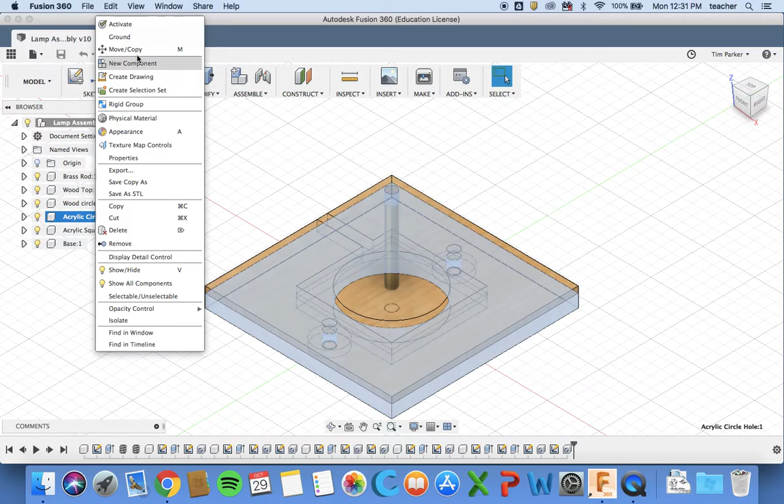We need two acrylic circle holes, so we're going to right click that. We're not going to copy, that's not the same thing. We're going to go to move copy, and we're going to click create copy. For that, you probably just want to drag it, maybe drag it off to the side here. Hit OK.

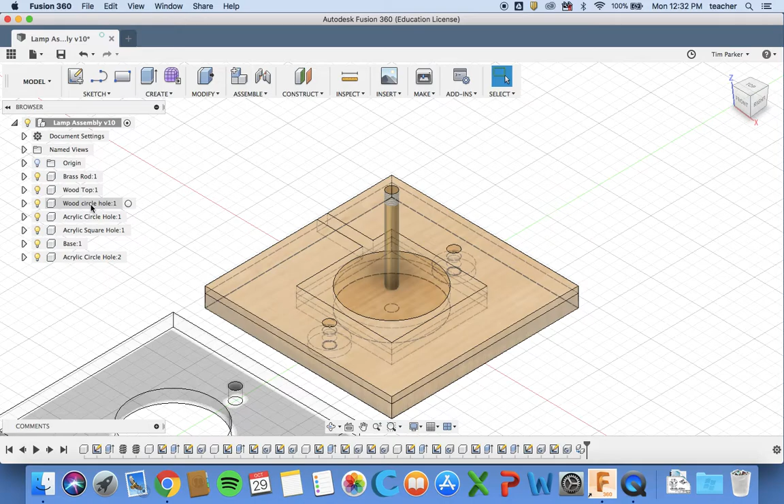Okay, so we've got acrylic circle hole 1, acrylic circle hole 2. We also think we also need another wood circle hole. So again, we can right click that, move copy, create a copy, and we're going to maybe drag it this way. So our wood one's right here. Hit OK.

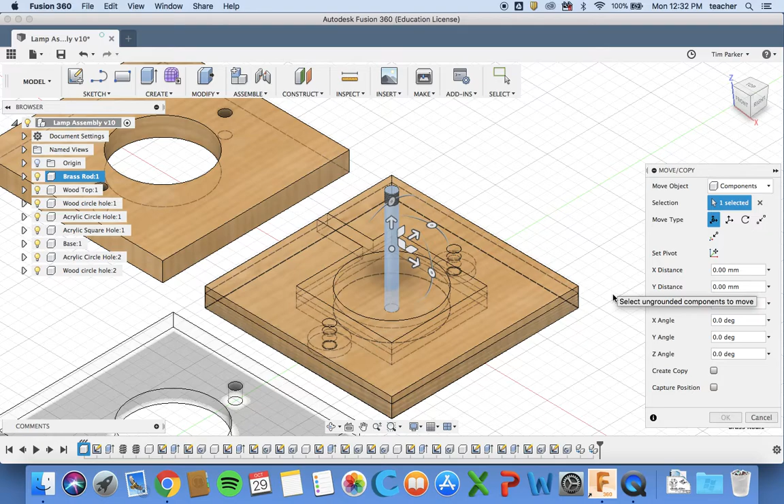Okay, wood circle, acrylic circle, both the second ones, the copies. Then we've got one wood top, and we're going to need two brass rods. So again, we're going to move copy, create a copy, and we're going to drag the brass rod, let's drag it out to here. Okay, so we've now got all the bits that we need.

Now what we want to do is we need to ground one of them. By grounding, it basically means that that can't move, that's fixed, so everything else will move to it. We want to start with the thing that is going to be our sort of bit that we screw into to begin with, and that's going to be the wood top. So our wood top, if we right click on that, we can ground it, and that will show a little drawing pin to show that's the one that's grounded.

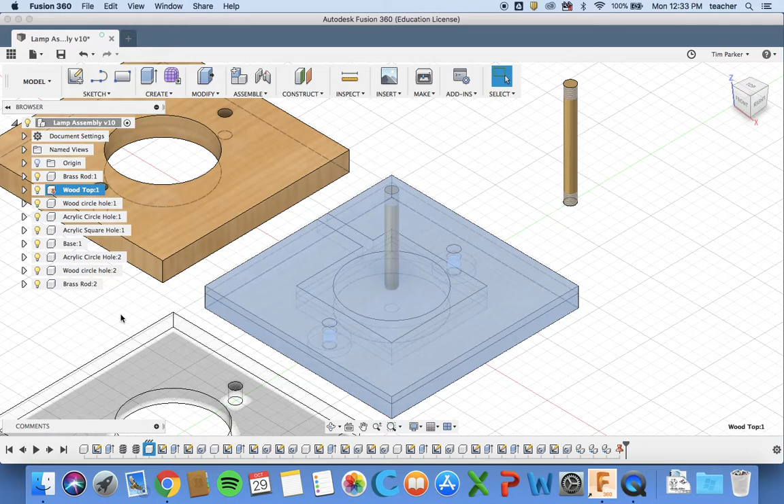Now what I'm going to do is I'm going to start assembling it. The best way to do this is to turn off all components you don't want to see, and just leave the two you do. So we want our wood top and we want our brass rod. Everything else, we can turn off the light bulb so that we can't see them anymore.

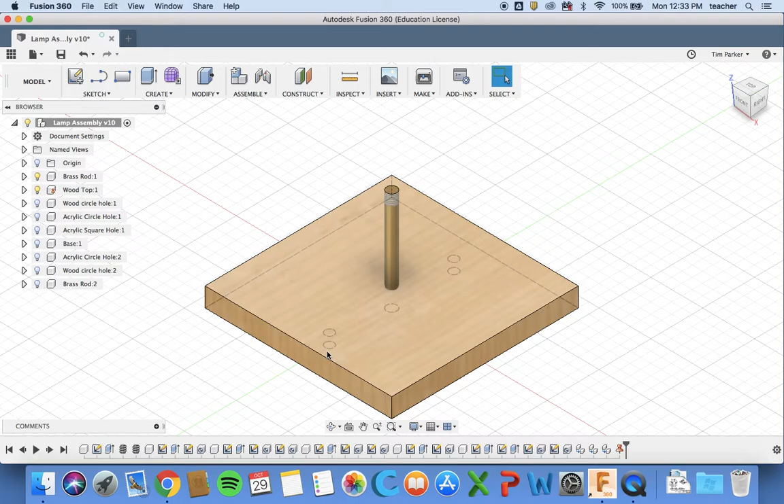Okay, so our brass rod is going to move to our wood top. Here's the top of the brass rod. We want that to connect into the hole, which is on the bottom - I'll show you here, the bottom of our wood top. And we also wanted to screw up 5mm into it.

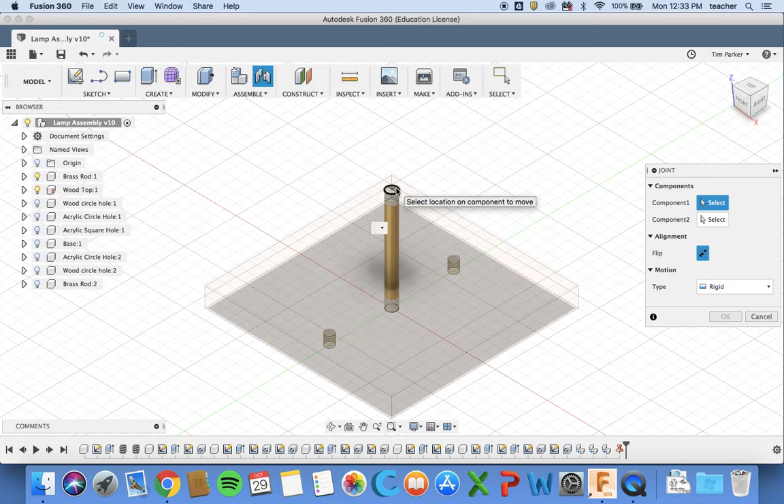If I go back to the original view, we're going to click assemble, so assemble a joint. If you click on joint, you can choose the top of the brass rod. If you just choose the circle, that's basically a moving point. Then if we click on the underside, so we've chosen component 1, for number 2, we need to look on the underside, and we want to choose this hole. So we select that as our second component, and you'll see it'll move towards it.

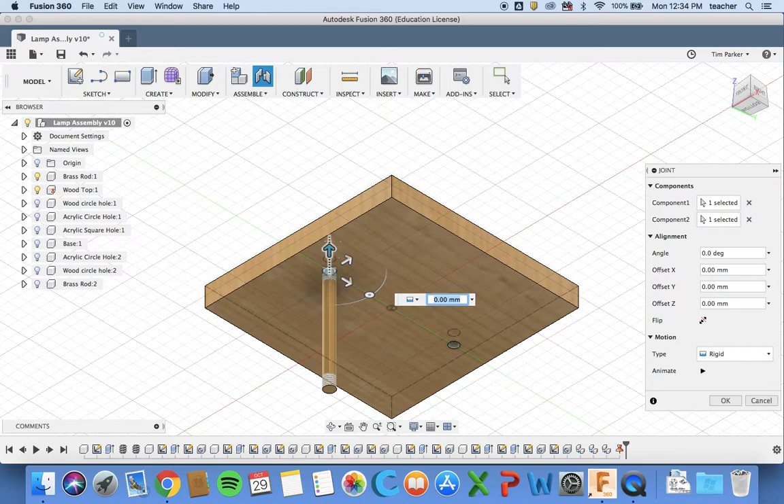Depending on what type of joint you've got here, it will do different things. So if I had it as a revolute one, you can see it's spinning. We're going to keep it as a fixed, rigid joint, but we do need to move it up 5mm, because if we look at the side view, it's not gone up into the hole. So we're going to click that arrow to move it up, and you can either drag it, or we can put a number, so I'm going to put 5, and it should go up 5mm. Enter.

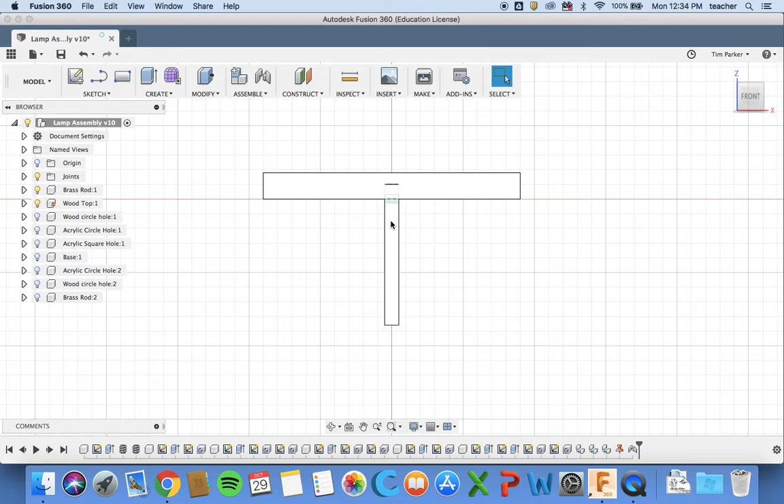So if I go back here, you can see that that's now inserted. You can double check it by going to the display settings, changing it to wireframe, and you can see that yep, so that is screwed inside of my hole. Okay, so I'll go back to my normal display.

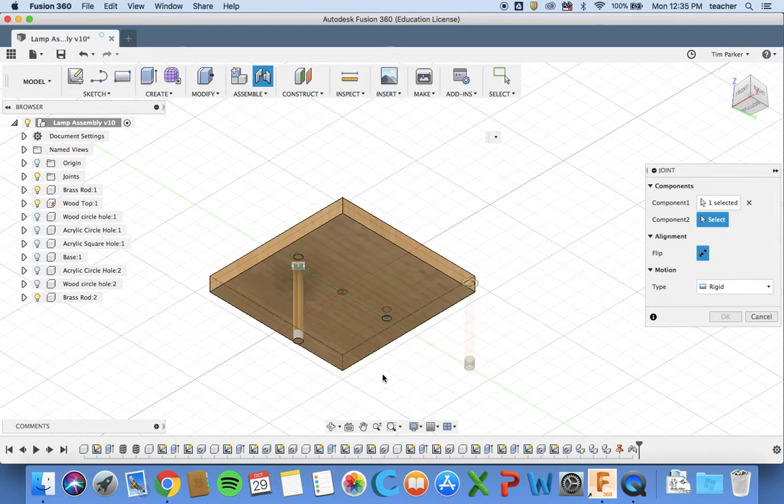Now we want to put our second brass rod into the other hole, so we're going to turn on that one, and we're going to click on joint. We're going to choose the top of it, same as we did before. We're going to choose the underside, same as we did before. And again, we need to click this top arrow to move it up by 5mm. Rigid joint, hit enter. So imagine they've been screwed in, or they're glued in, for example.

So they're not going to move anymore. I can check that they're both the same by turning it sideways. Yep, they look about right.

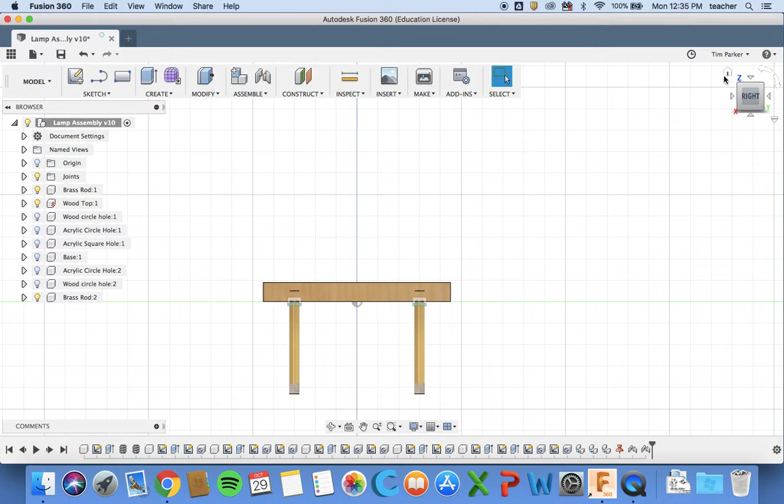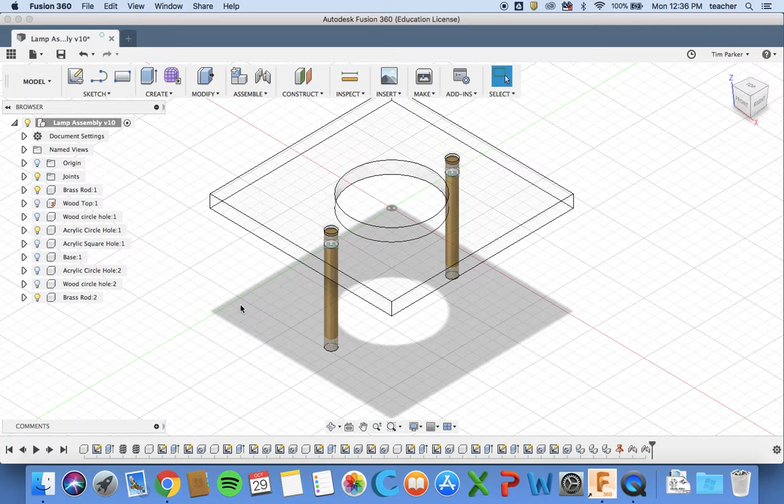Okay, so the next thing is we're going to bring in our acrylic circle layer, acrylic circle number 1. It's already in here, but it's just not quite in the right position. For that, I'm going to turn off my wood top for a second so that I can locate different bits. I'm also going to turn off my brass rods because they're sort of right in the way of it.

And I'm going to click joint, and I want to click the top. So my circle, the top of my circle area, just the one on the left, that's fine. And then for our second part, we're going to turn off this, and we're going to turn on our wood top.

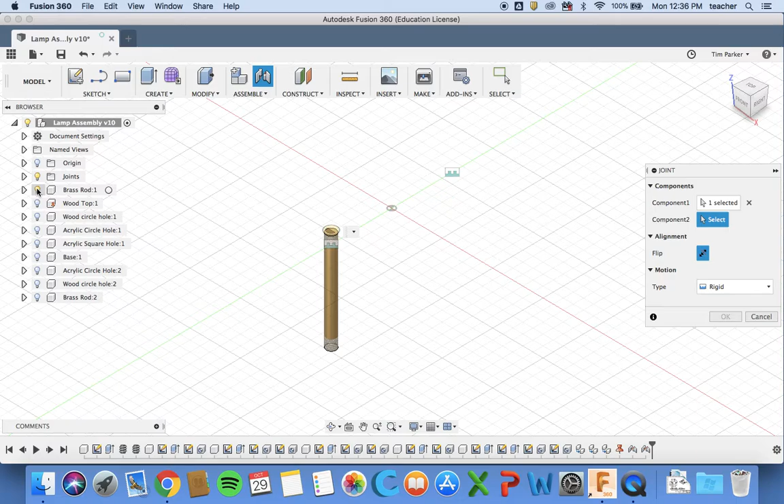We're going to turn on our brass rod, and choose the bottom of the brass rod. Now if I turn back on my acrylic circle, you'll see it's moved to it. So now I can turn them all back on.

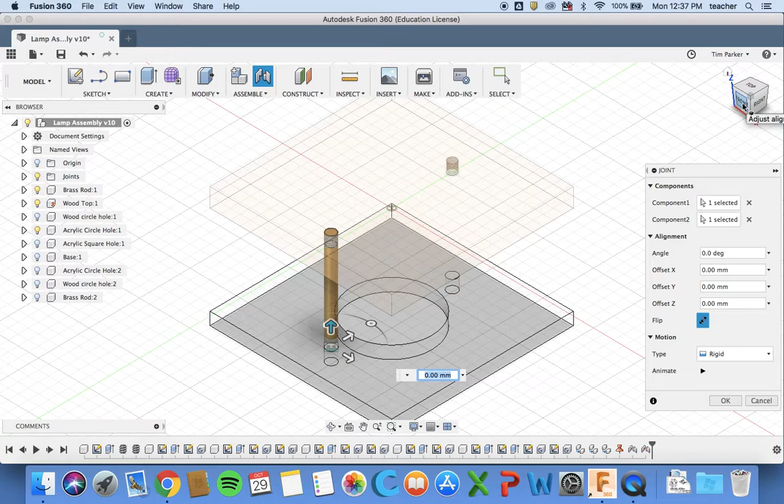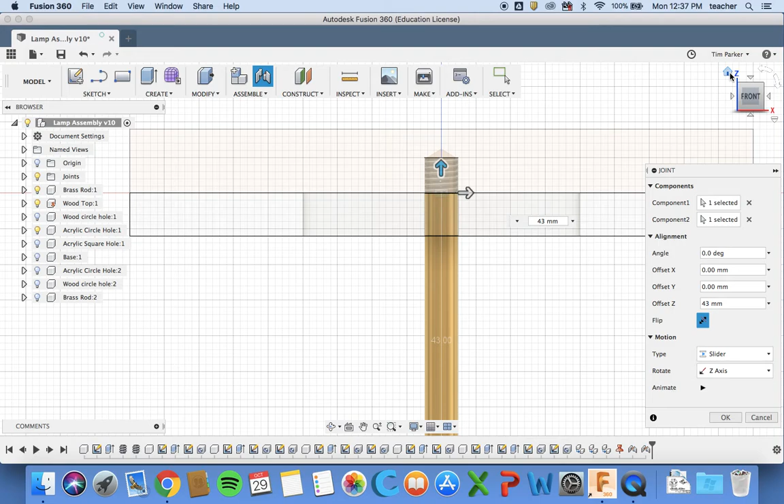This time we just want to move it up. Easiest way is to turn it so you can see it sideways, then drag it up until it's in line. If you zoom in, it should be an exact number, I think 43 millimeters. I haven't worked this out, but that looks correct. Type in 43. And that's going to be not a rigid joint, it's a slider joint, so it can slide up and down on the tube. Hit enter - so we've got our first piece of acrylic slid onto our rod.

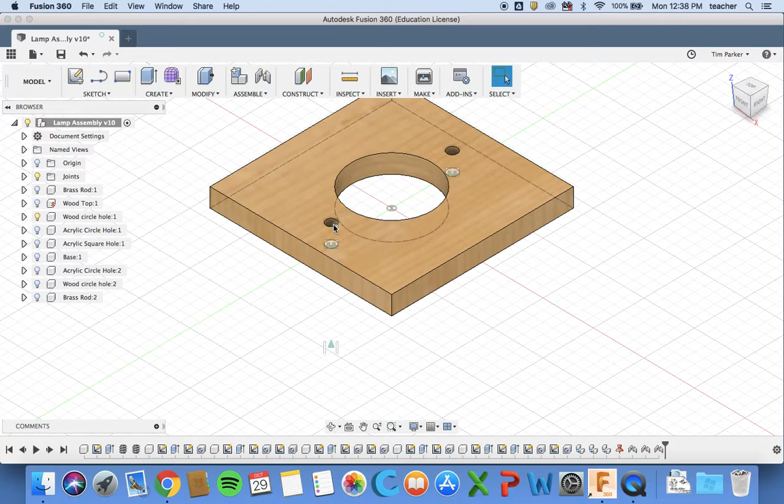I can also turn the other rod back on. For the next piece we're going to have a wood circle. I'm going to turn off all the other ones just so I can select this, go to joint, choose the top of that, turn that off, turn on my brass rod 1, and choose the bottom of it. You'll see my wood circle has moved to it.

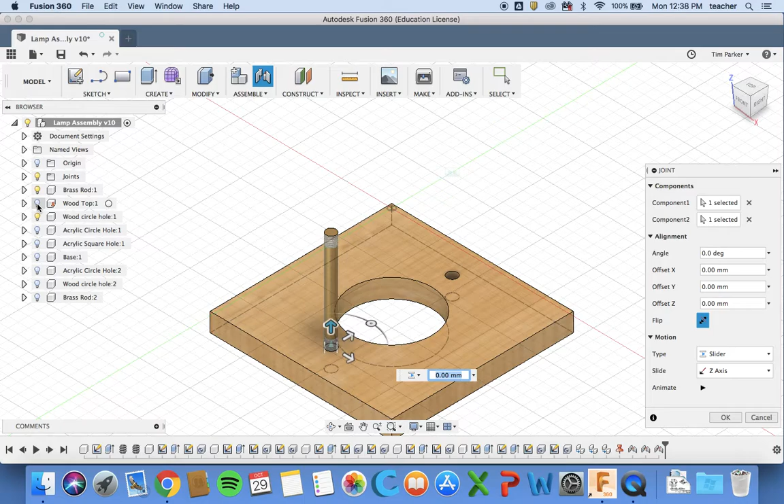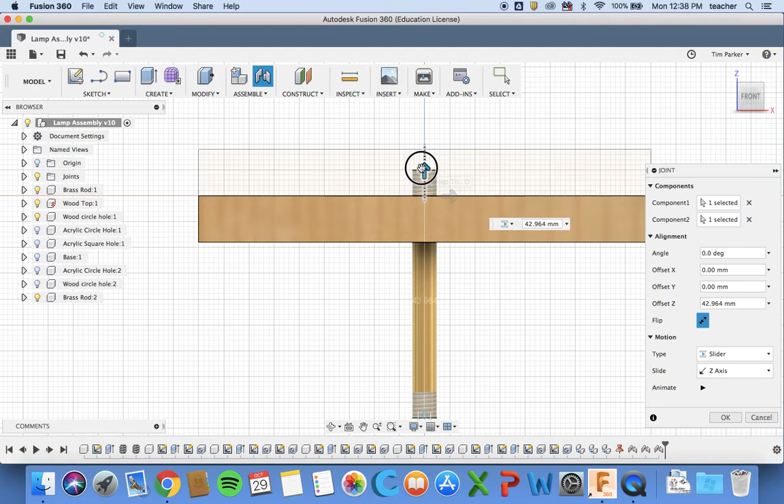I can turn everything else on now, and drag that up - again it's going to be a slider. If I turn it sideways to side view and zoom in, I can bring it all the way up so it lines up. I think 43, yep that looks right. Hit enter.

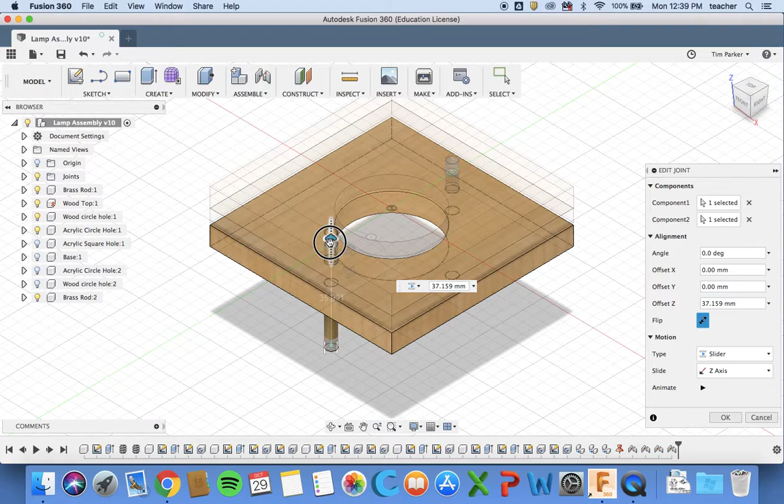I've just realised I've done the wrong thing - I've moved a piece of wood. I've made a slight error here, I forgot to turn back on my acrylic, so I've actually slid it too far. If I go back to my joint here, the latest joint in my timeline, right click, edit joint, I can bring it back down again. It went too high. I just need to make sure I turned on my acrylic - I was thinking 43 didn't seem right.

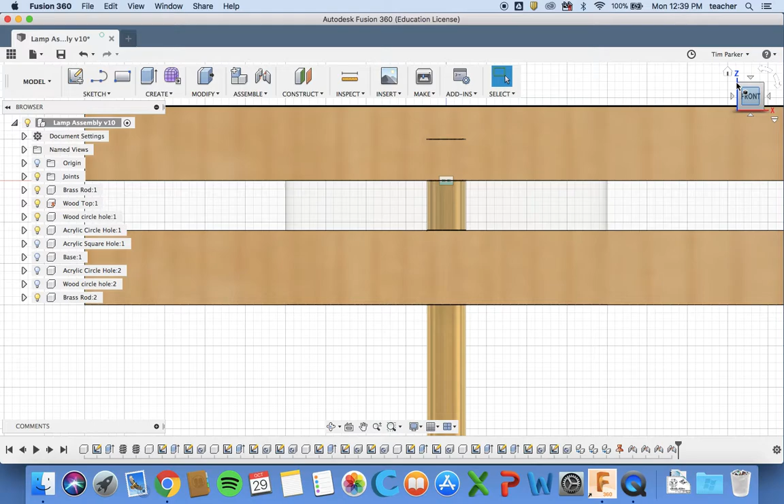If I drag that up in line with my piece of acrylic, it's showing to be 37, I think. Does that look right? Zoom in a bit. Yes, 37, okay so 37 for that one. So I've now got my wood top, my acrylic circle, my wood circle.

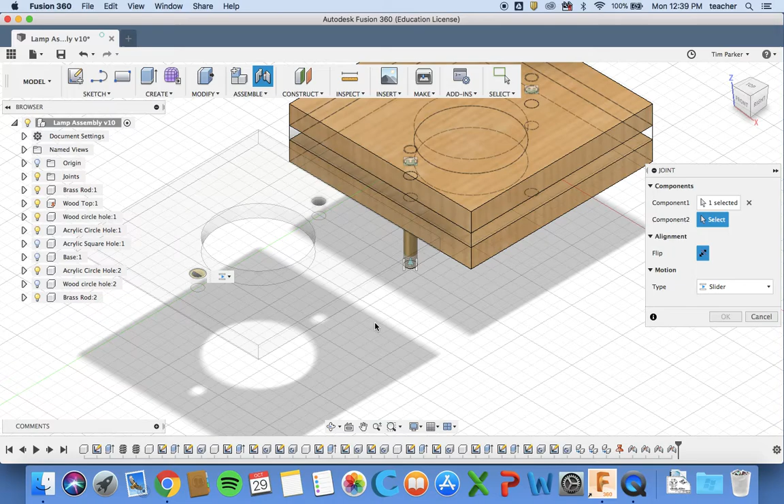Now I'm going to have another acrylic circle, number 2, this one over here. This time I don't really need to turn these off because this one's out of the way. So I'm going to go to joint, choose the top of here, choose the bottom of here, and you'll see it sliding up and down. Now I'm going to turn to my side view and drag it up until it fits, so that's going to be 28, I think. Yep, so 28 for that one.

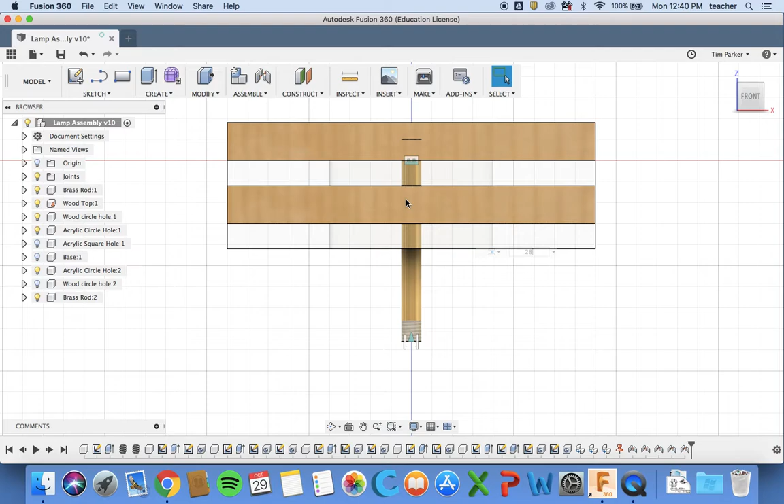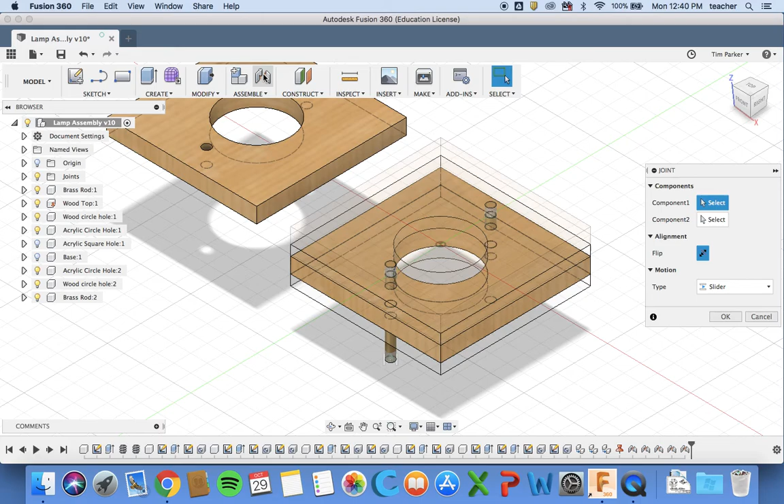You can see it coming together. So the next one is I now need another wood circle - wood circle hole 2, this one. I turn that on, it's off to the side. Same thing again - joint, choose the top of this, bottom of brass rod, slide into position. Now I'm going to turn it sideways and drag it up until, I think for this one it's going to be 22. Yep, okay, 22 for that one.

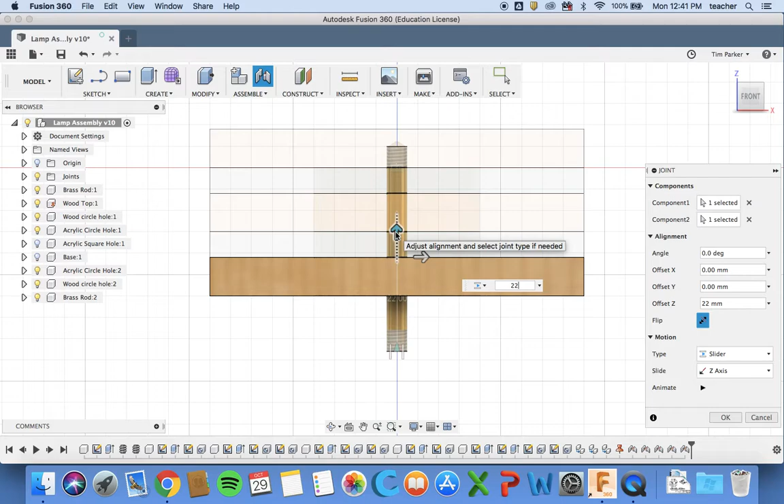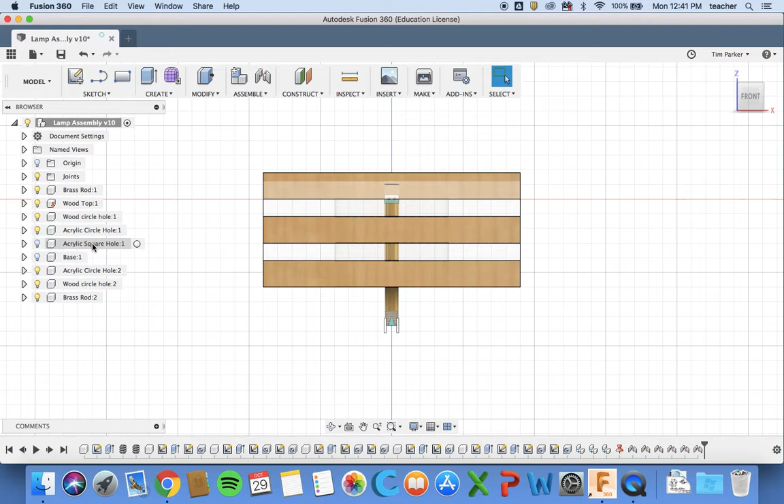Underneath that I'm going to have, I think, my acrylic square this time. My acrylic square is sort of hidden in here, so the easiest thing is we might want to drag it out. If I go to acrylic square, right click, move, and drag it out so that I can see it. Hit OK.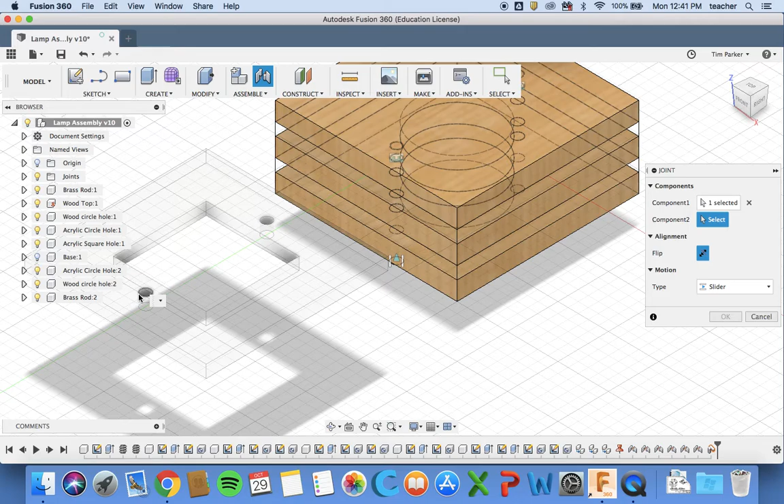So for this I'm going to go to joint, same as we've done before - yep, capture position. I'm going to choose top of here, find my brass rod, and you can see it moving into position. Again, drag it up - I think it's going to be 13. Yep, that's right, okay so 13.

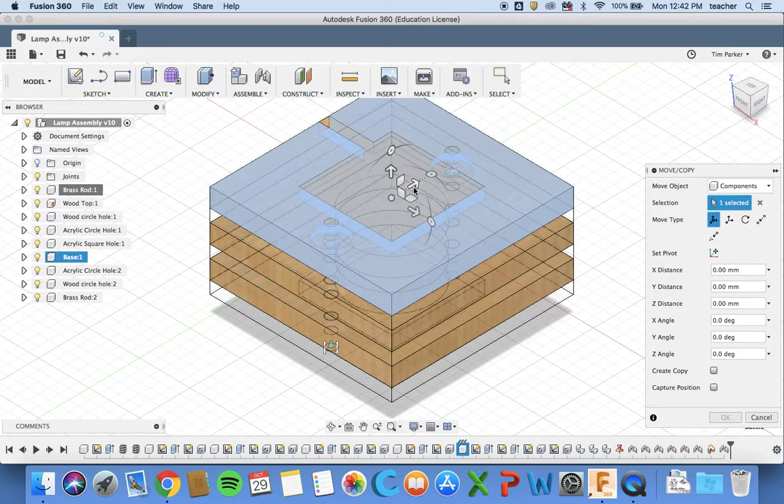And then my last piece to go onto it is my base. Turn the base on - I probably want to move this out of the way rather than turning off all of these lights, so I'm just going to right click, move, and drag that right to the side. Hit OK.

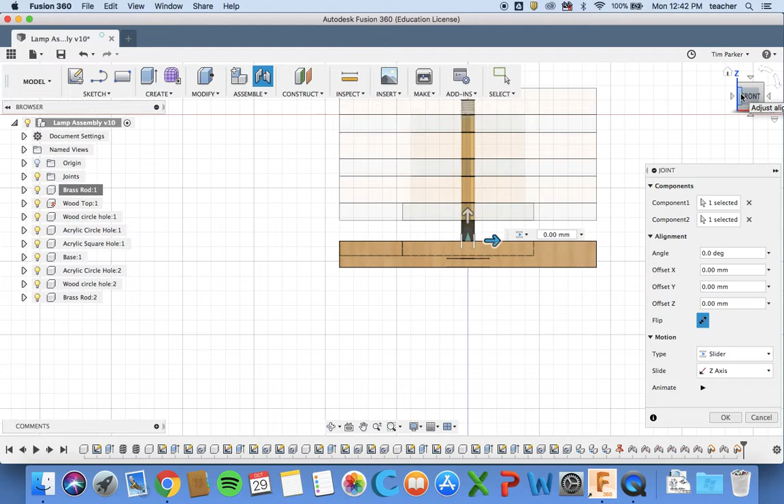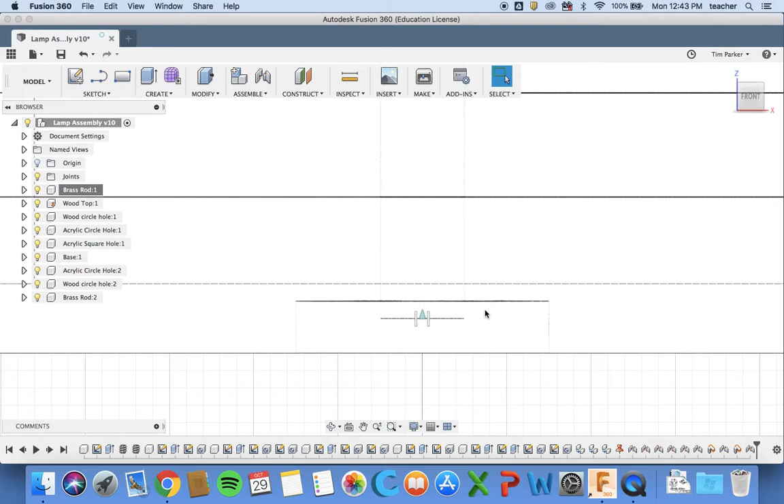I'll go back to my shaded view. So that is all the pieces that I need. I'm then going to import 2 nuts, which I'll show in the final video.